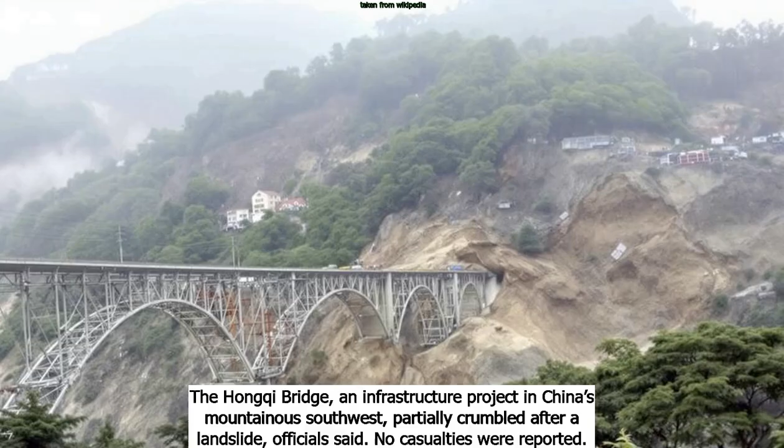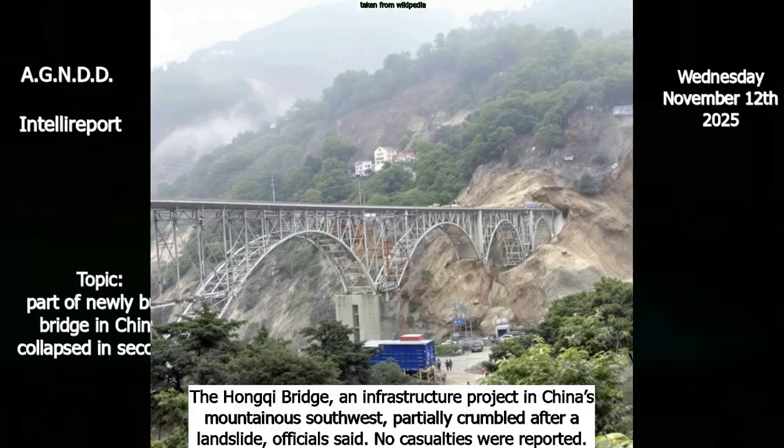Video shows part of newly built bridge in China collapsing in seconds. The Hongqi Bridge, an infrastructure project in China's mountainous southwest, partially crumbled after a landslide, officials said. No casualties were reported. The Washington Post, November 12, 2:24 a.m. EST.

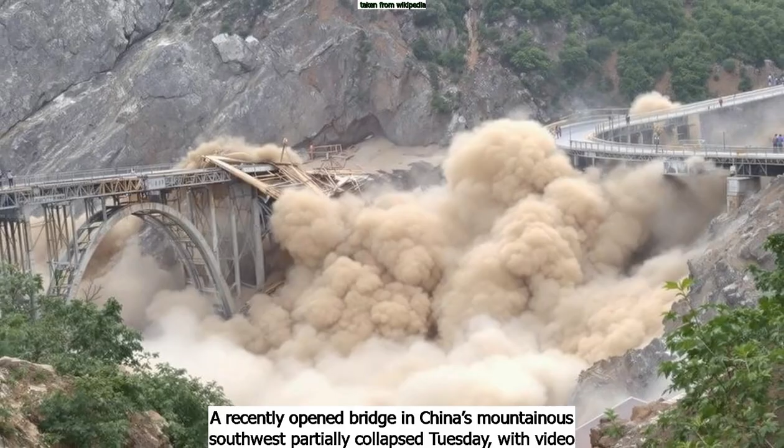www.washingtonpost.com/world. By Lyric Lee and Julie Yoon. A recently opened bridge in China's mountainous southwest partially collapsed Tuesday, with video showing huge dust clouds swiftly enveloping what remained of the structure. There were no reports of casualties.

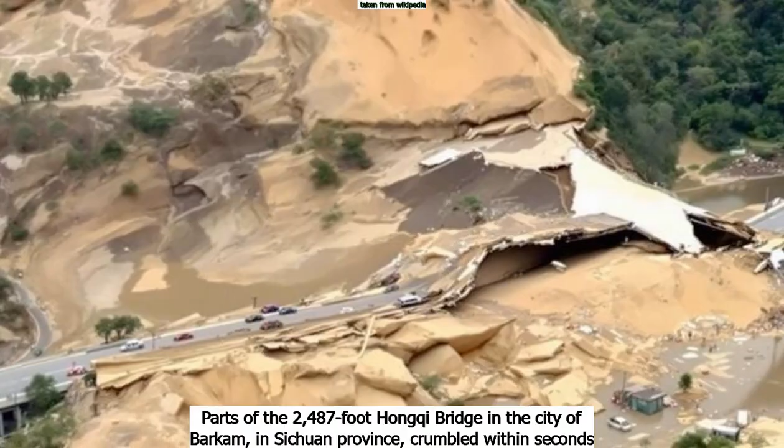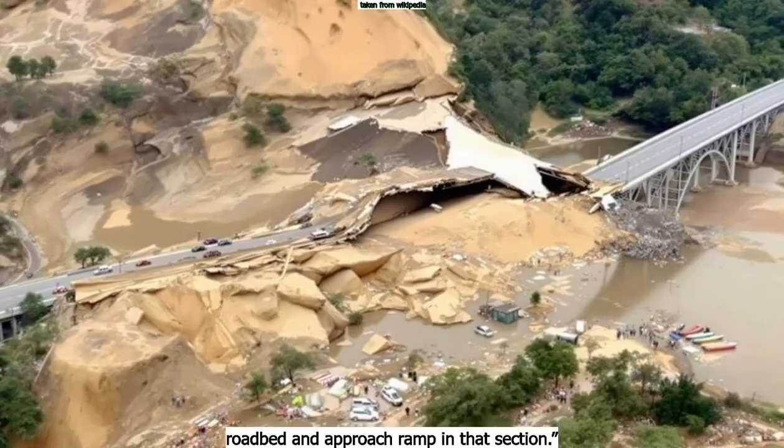Parts of the 2,487-foot Hongqi Bridge in the city of Barkam in Sichuan province crumbled within seconds around 4 p.m. local time. The local government said in a statement that a landslide caused the collapse of the roadbed and approach ramp in that section. Police had already closed the bridge to traffic and cordoned off the area by Monday night, after local authorities identified cracks in the structure and instability on the surrounding slopes.

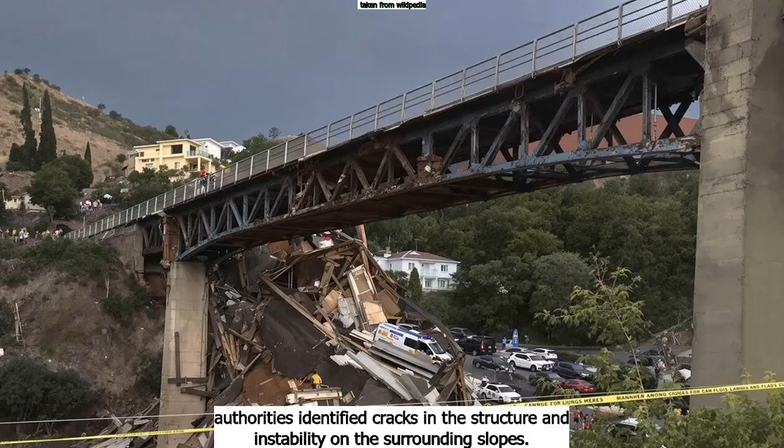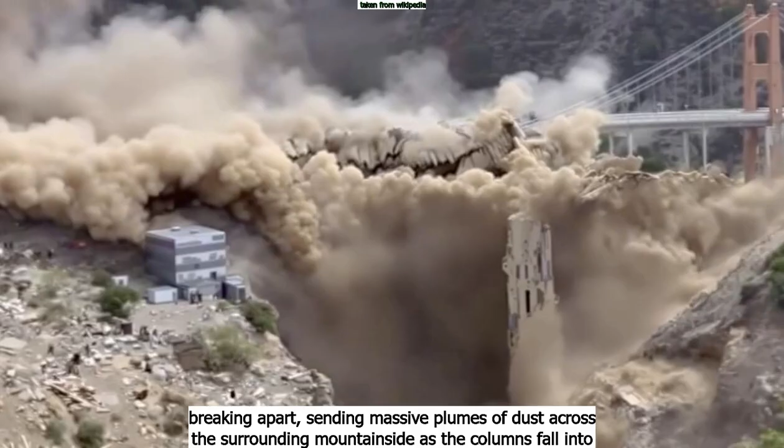Video of the collapse, first posted on social media and verified by Reuters, shows a section of the bridge breaking apart, sending massive plumes of dust across the surrounding mountainside as the columns fall into the water below. The remaining section hangs over the river.

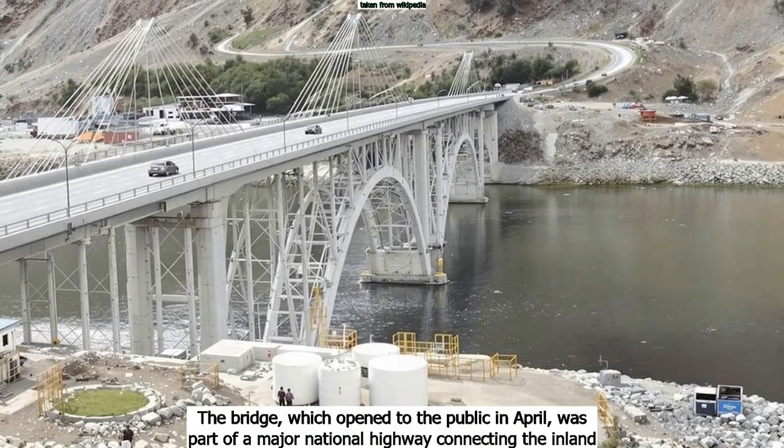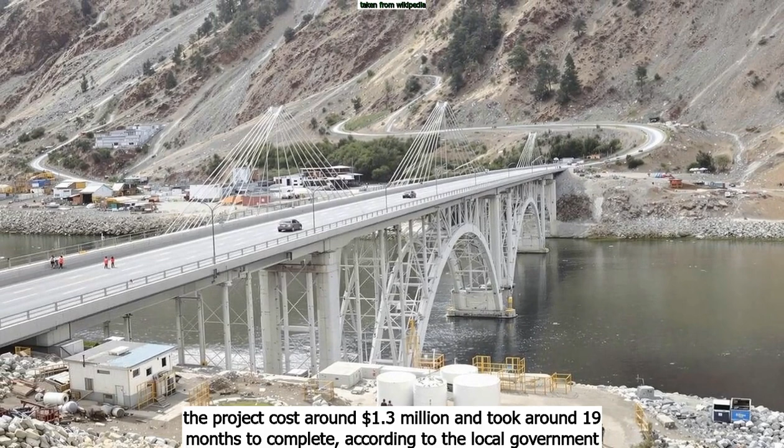The bridge, which opened to the public in April, was part of a major national highway connecting the inland Sichuan province with the neighboring region of Tibet. Hailed by officials as a local engineering milestone, the project cost around $1.3 million and took around 19 months to complete, according to the local government website.

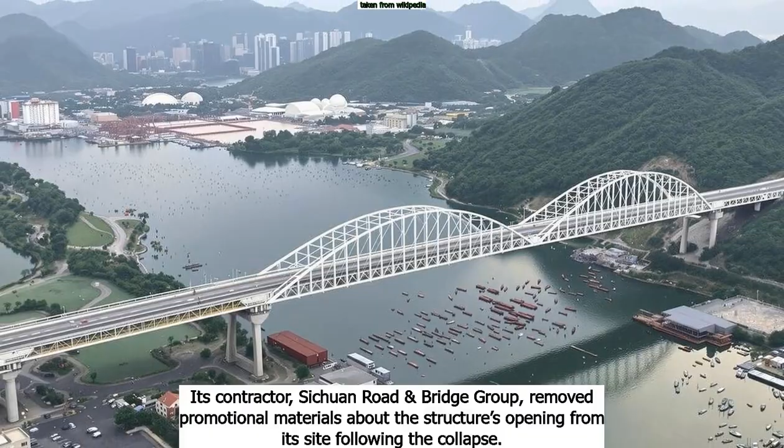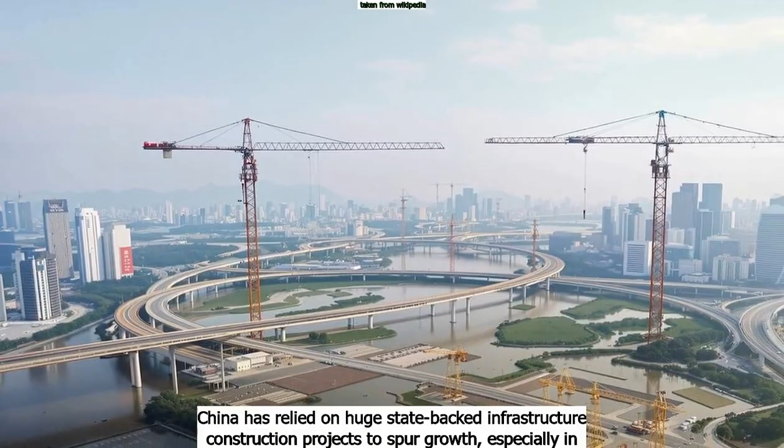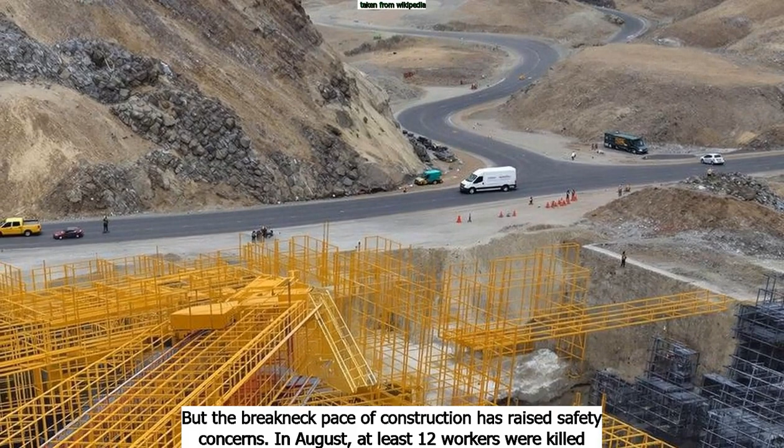Its contractor, Sichuan Road and Bridge Group, removed promotional materials about the structure's opening from its site following the collapse. China has relied on huge state-backed infrastructure construction projects to spur growth, especially in inland regions, which have long lagged behind the prosperous coast. But the breakneck pace of construction has raised safety concerns.

In August, at least 12 workers were killed when a bridge under construction in the northwestern province of Qinghai collapsed, according to a report in the state-run China Daily newspaper.

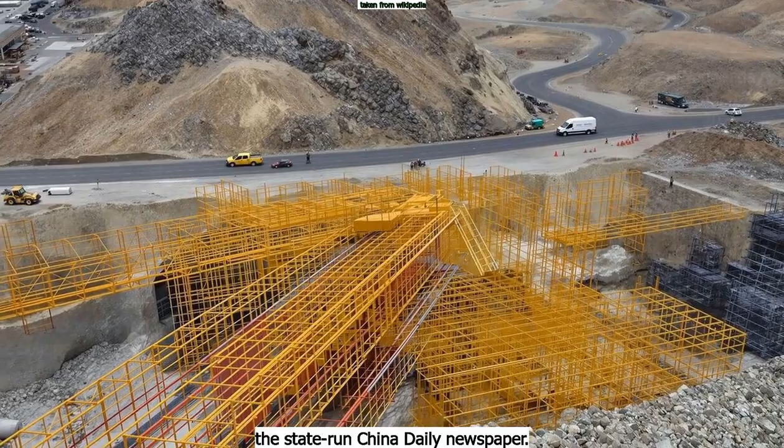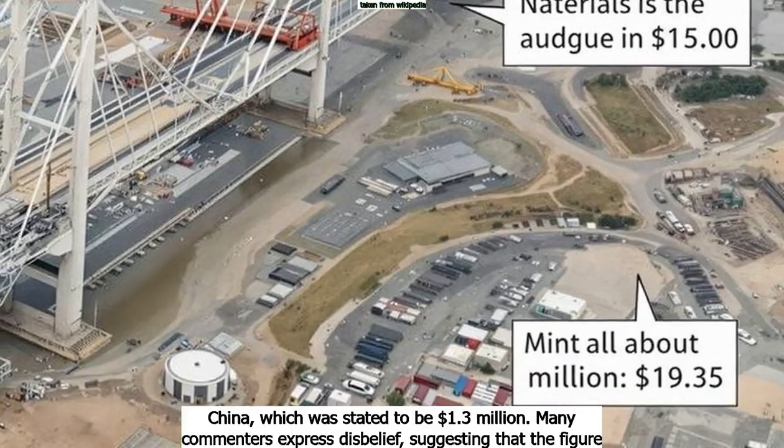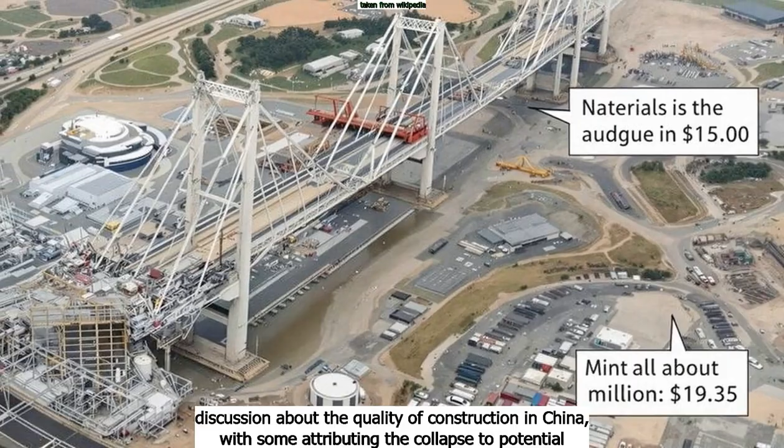Conversations, comments summary: the comments predominantly focus on skepticism regarding the reported cost of a collapsed bridge in China, which was stated to be $1.3 million. Many commenters expressed disbelief, suggesting that the figure is likely a mistake and should be in the billions, given the size and scope of the project. There is also discussion about the quality of construction in China, with some attributing the collapse to potential shortcuts in materials and construction techniques. Additionally, a few comments touch on the broader context of infrastructure development and regulatory oversight in China compared to other countries.

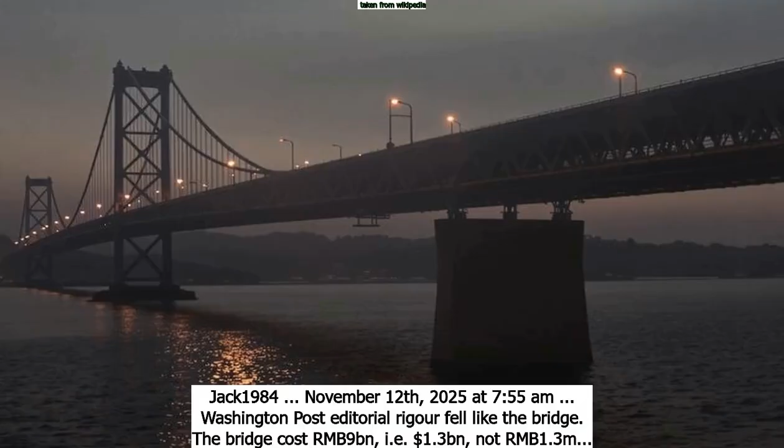Jack1984, November 12, 2025 at 7:55 a.m.: Washington Post editorial rigor fell like the bridge. The bridge cost RMB 9 billion, that is $1.3 billion, not RMB 1.3 million. Truth defeats lies. Cost only $1.3 million, is that right? Pig can fly. Let me correct this article: $1.30 billion. User, what I was saying 4 hours ago: If it cost $1.3 million, that might explain why it collapsed.

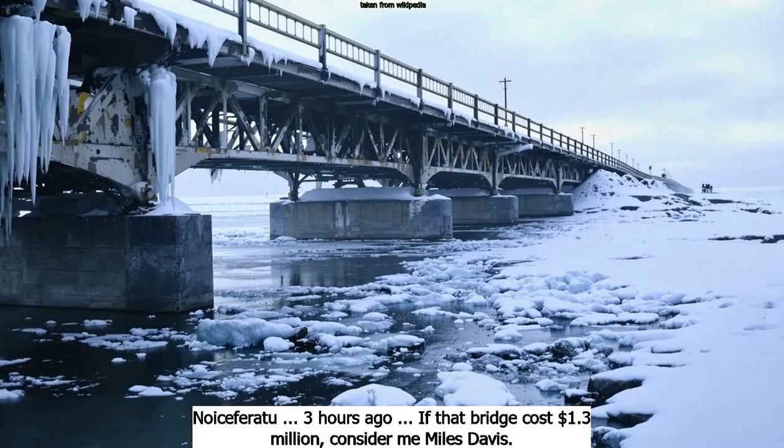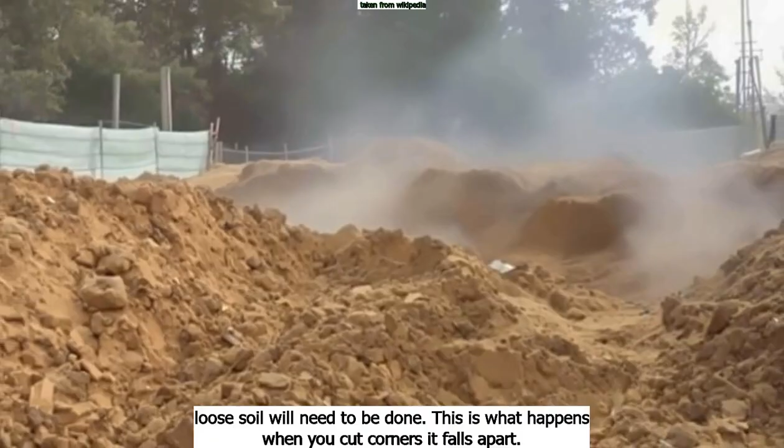Noiceferatu, 3 hours ago: If that bridge cost $1.3 million, consider me Miles Davis. Howard Scott Howes, 4 hours ago: This will give China to do more site grading, and stabilization of the loose soil will need to be done. This is what happens when you cut corners. It falls apart.

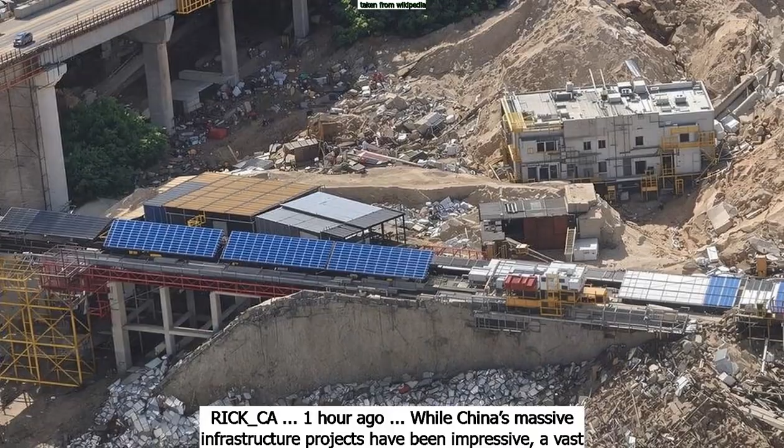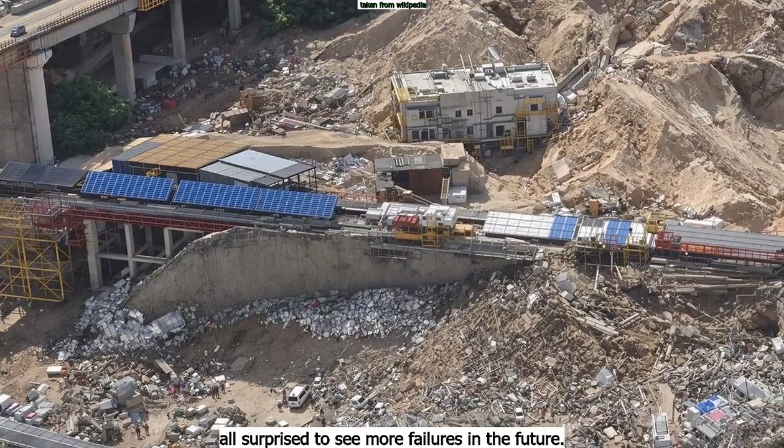Rick_CA, 1 hour ago: While China's massive infrastructure projects have been impressive, a vast number were built with substandard materials and questionable construction techniques. Would not be at all surprised to see more failures in the future.

Vet 46: after local authorities identified cracks in the structure and instability on the surrounding slopes. So no pre-construction examination of that hillside?

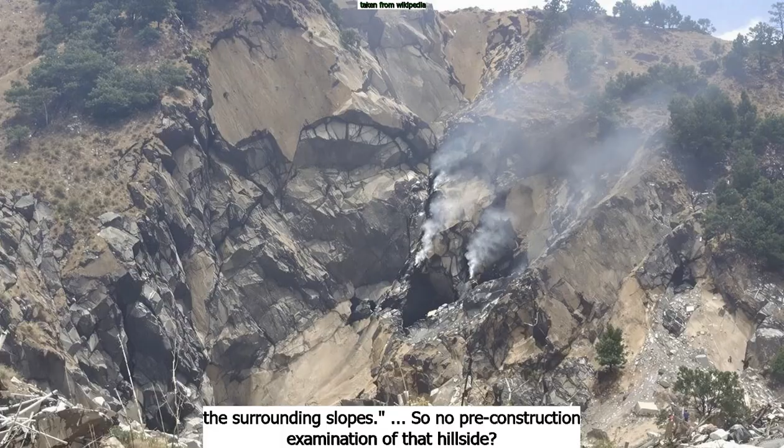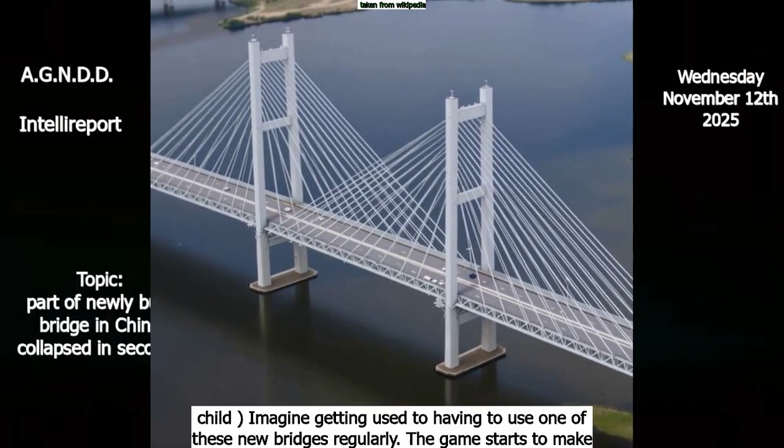David Cushman, 2 hours ago: When we were kids, we played a travel game where we tried to hold our breath for the full time of driving across a bridge. Charleston's Cooper River Bridge seemed appropriate to a child. Imagine getting used to having to use one of these new bridges regularly. The game starts to make sense.

Sick of winning, 3 hours ago: They'll have it rebuilt in a week.

Angus F., 2 hours ago: So is it the bridge that failed, or as the story seems to suggest, the slope underlying the bridge failed, taking the bridge with it?

Stephen S.J., 3 hours ago: Total repair cost is estimated to be $750,000 according to local Communist Party officials. They explained that labor costs are free.

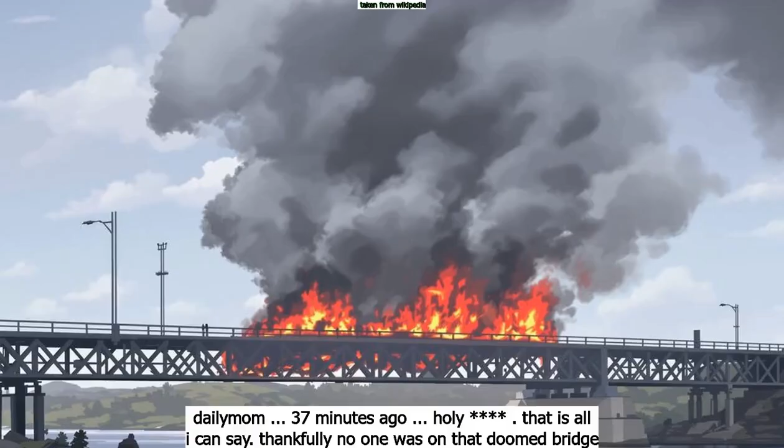Daily Mom, 37 minutes ago: Holy ****. That is all I can say. Thankfully, no one was on that doomed bridge.

Sherry G., 2 hours ago: reminds me of bridge on the River Kwai.

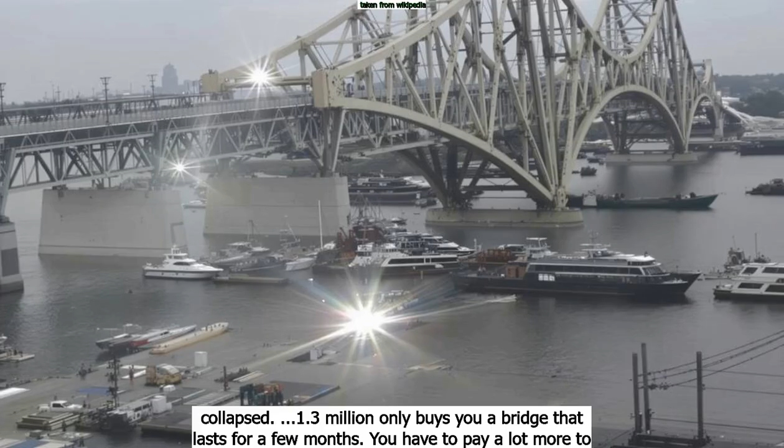Chris, 82, 2 hours ago: Everyone, the bridge absolutely did cost only $1.3 million. That's why it collapsed. $1.3 million only buys you a bridge that lasts for a few months. You have to pay a lot more to get something with a lifespan measured in decades.

Foot goo, 1 hour ago: Silly Chinese. Not building a bridge to withstand several million tons of lateral force. Anybody remember Galloping Gertie, the Tacoma Narrows Bridge?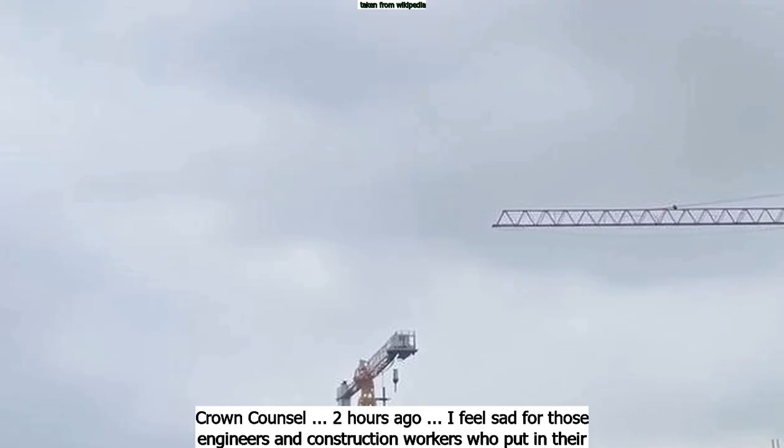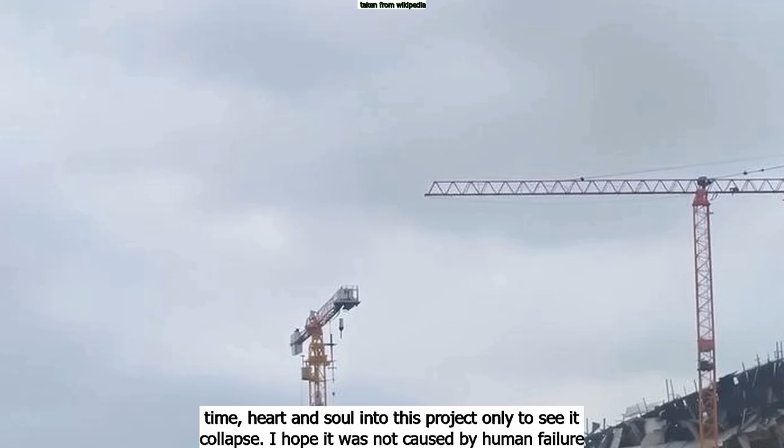Crown Counsel, 2 hours ago: I feel sad for those engineers and construction workers who put in their time, heart, and soul into this project only to see it collapse. I hope it was not caused by human failure, design, but sometimes Mother Nature can be unpredictable. The resulting study as to the cause will be interesting to read.

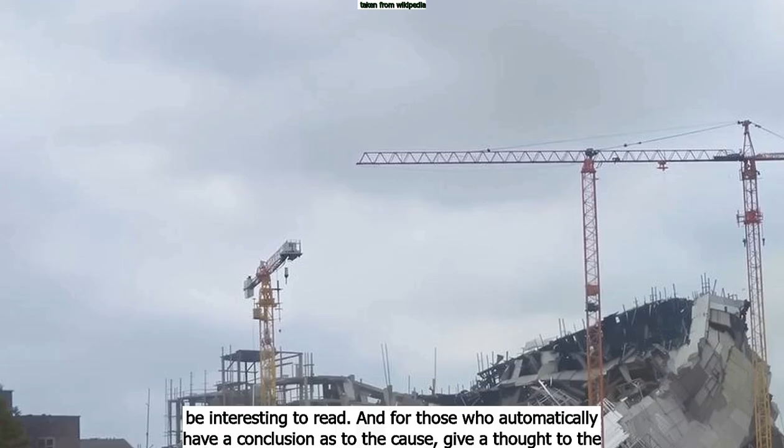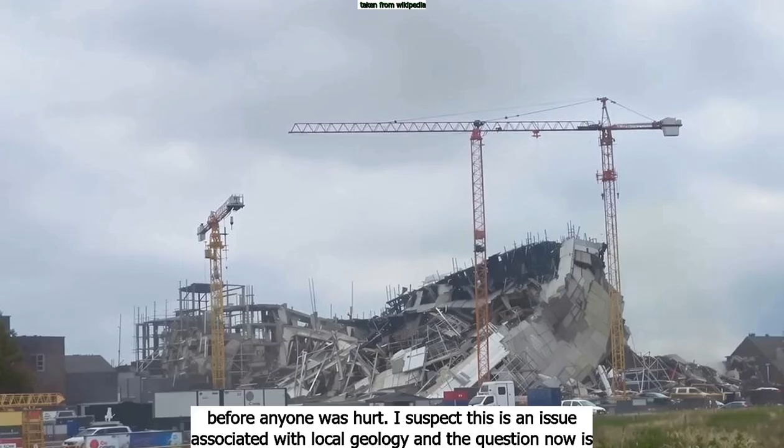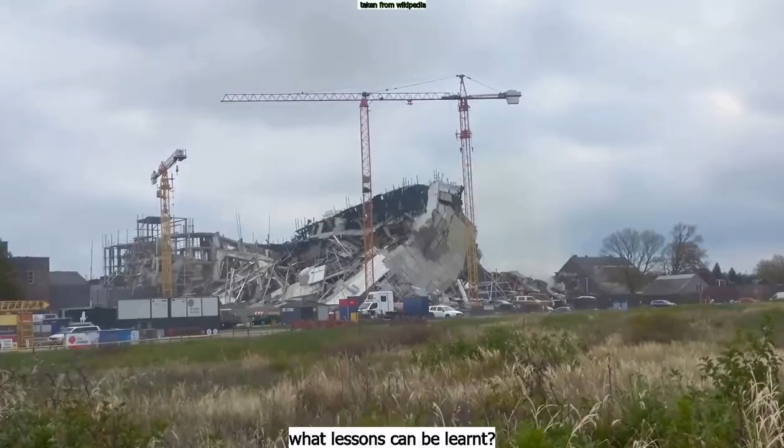And for those who automatically have a conclusion as to the cause, give a thought to the local authorities who clearly had the resources in place to catch the fault in time to close down the bridge before anyone was hurt. I suspect this is an issue associated with local geology, and the question now is what lessons can be learnt. Iron Lady, 2 hours ago: gives renewed meaning to Made in China.

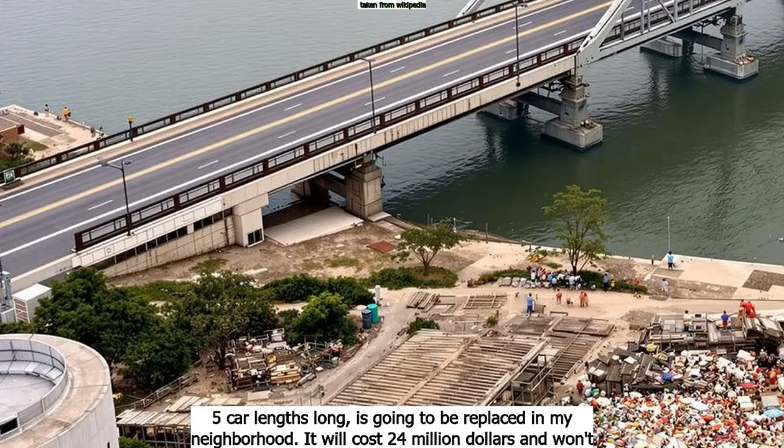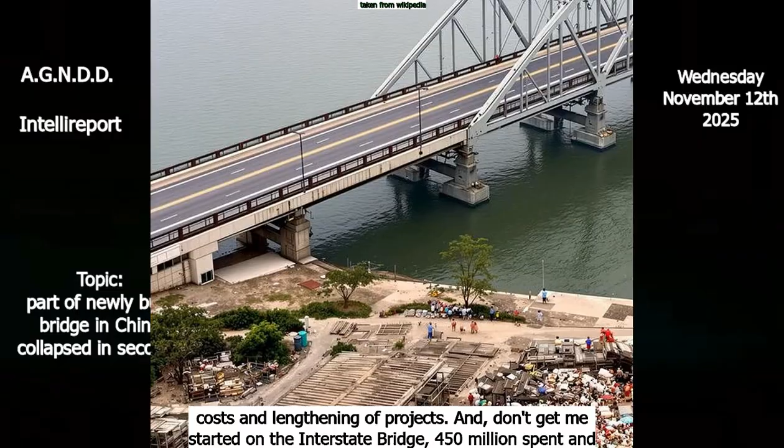Duck Fan, 3 hours ago: The Chinese take shortcuts, the United States takes years. A small 2-lane bridge, 5 car lengths long, is going to be replaced in my neighborhood. It will cost $24 million and won't be complete until 2030. Red tape, regulation, padding, and silly add-ons, equity, all contribute to ridiculous costs and lengthening of projects. And don't get me started on the interstate bridge. $450 million spent and no bridge at all was built.

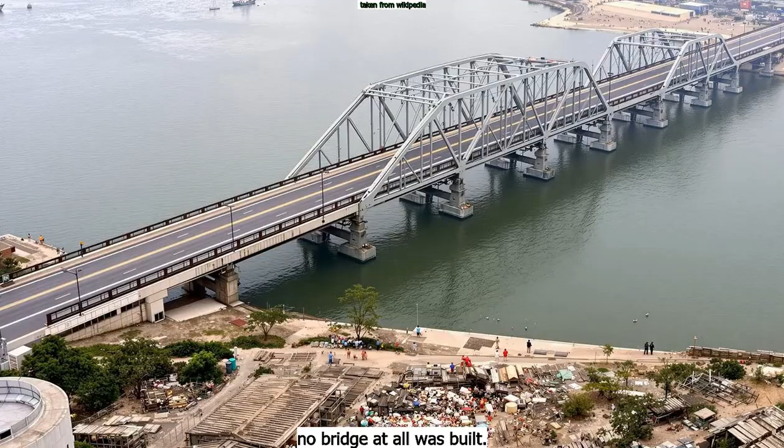Philip Barr, 4 hours ago: My first thought after seeing it on TV was China. Sure enough. Evening Sky, 6 hours ago.

Call out the firing squad. She won't be happy. Those More, 8 hours ago.

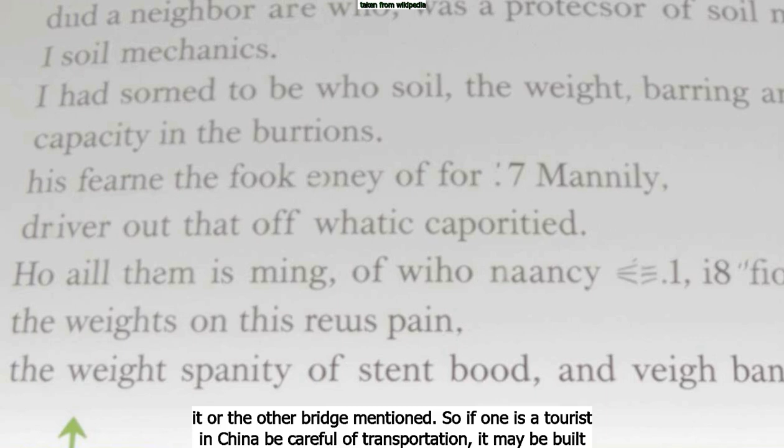I had a neighbor who was a professor of soil mechanics, the weight-bearing capacity of soil. He did a textbook. He was apparently famous for his work. He would do a study of this collapse if he were hired and were alive. This collapse was dramatic. I suspect no engineer who could say no passed on building it or the other bridge mentioned. So if one is a tourist in China, be careful of transportation. It may be built sloppily to one's detriment.

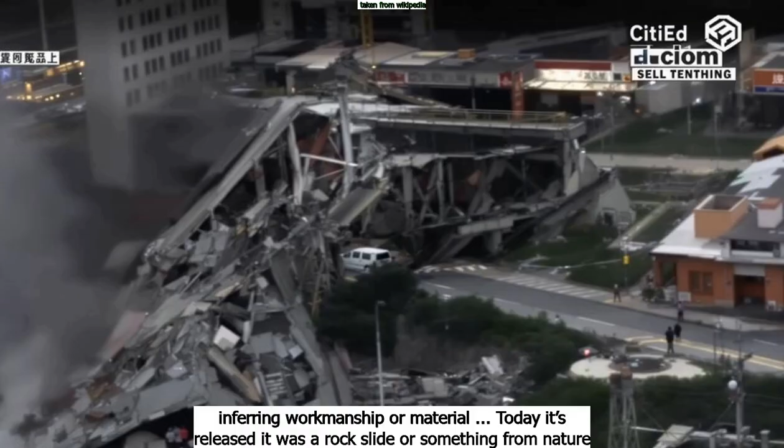CitiEd, 5 hours ago: Most American newspapers reported yesterday that the bridge collapse in China inferred workmanship or material. Today it's released that it was a rock slide or something from nature that caused the collapse. Can't trust the U.S. press to report a simple story correctly.